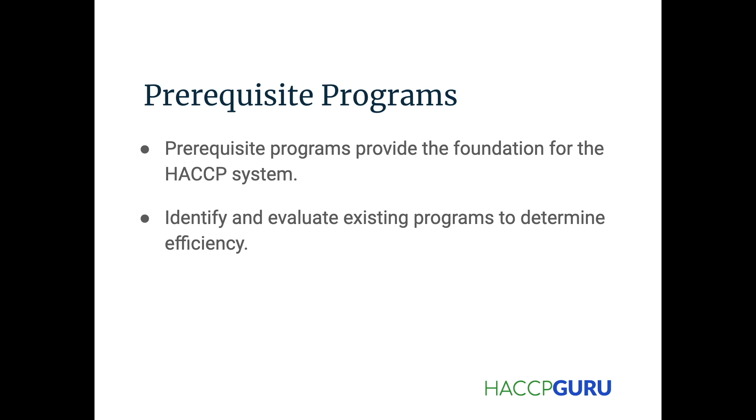So implement well-designed prerequisite programs first in order to do that. Prerequisite programs provide the foundation for the HACCP system and identify and evaluate existing programs to determine efficiency. So there's 5 initial tasks that we have to do in order to implement the HACCP plan system the right way.

One is assembling the HACCP team, which includes the HACCP coordinator and a multidisciplinary unit. It can't just be food safety and quality. It has to be comprised of logistics and operations and maintenance, all parties, right? Consultants, if necessary. Sometimes you don't need a third party to come in and do it, but they help, especially with audits and stuff.

Ad hoc groups. So how do I connect and contact everybody if we find out that we've got a big deal and we got to get product on hold? How do we make sure everybody's involved and everybody is aware such that we can execute and minimize the risk as soon as possible, right? We can't do that efficiently if we don't have some type of ad hoc group, some type of protocol to be able to disseminate that information responsibly.

Second one is describe the food and its distribution. So you use common names and ingredients, the nature of the product and the shelf life, the general description of the process, the type of storage and distribution, the parameters related to food safety like the pH, the water activity, packaging, preservatives, etc.

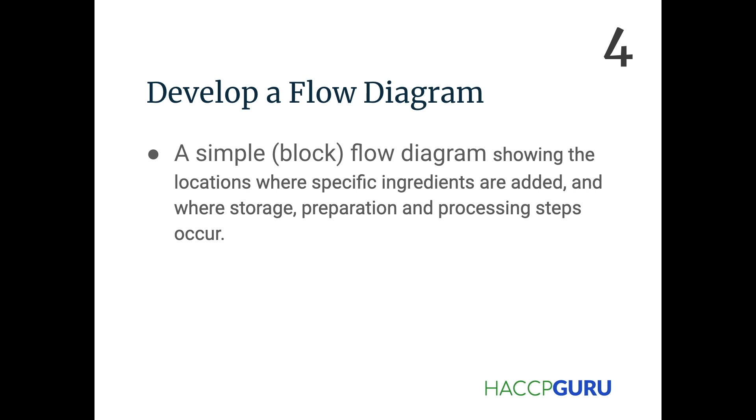And then the last one is description of product and process. So the block flow diagram should be supplemented with the description of product and process flow. It may include information associated with ingredient storage, preparation, equipment, processing, packaging, storage, and distribution.

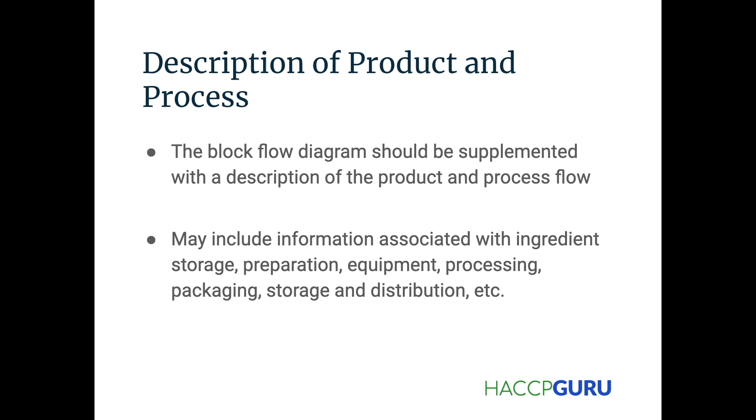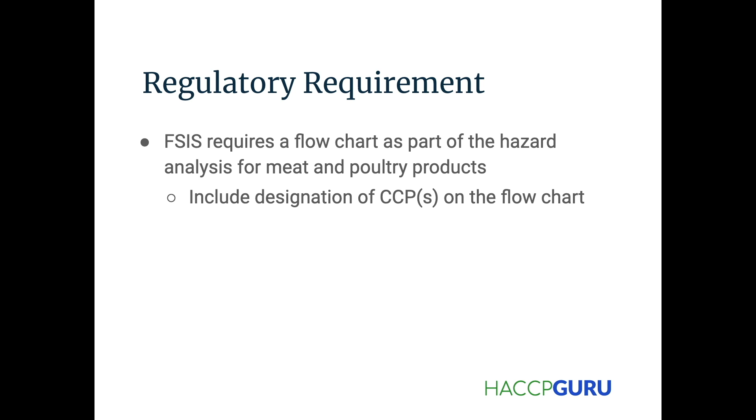There's a regulatory requirement as well. For instance, FSIS requires a flowchart as part of the hazard analysis for meat and poultry products, including designation of CCPs on the flowchart. We need to know where they are. We don't necessarily need to know where all the control points are, but everything that's critical needs to be identified.

So the last one is verifying the flow diagram. Now that we created it and we've got all the information on there, the CCPs, etc., now we've got to walk it. A flow diagram should be verified for accuracy and completeness on site during an inspection of equipment and operations in the whole facility. Usually that happens as a group, not by one person, because everybody's looking at the same thing differently, and we need all that information when we're putting together the program.

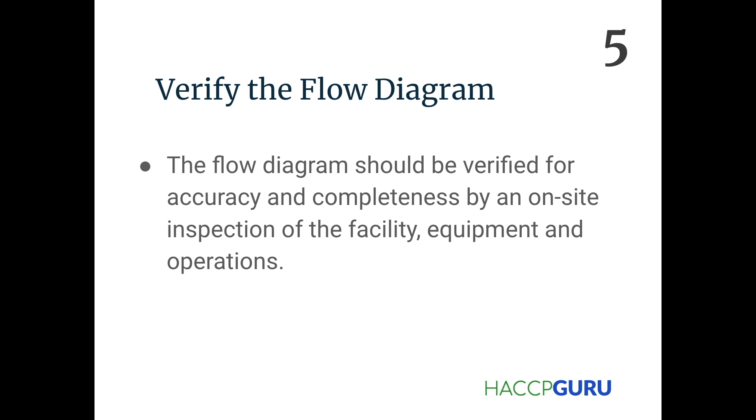So the summary of the tasks, again: assemble the HACCP team, describe the food and its distribution, identify the intended use and consumers, develop the flow diagram, and then make sure that it's accurate. Any questions? All right, that was quick.

So what are the two things that must be certain in order to develop a robust HACCP plan? Hopefully you wrote it down. The management team needs to be invested both in spirit and in the pockets. And then the prerequisite programs must be solid. You are well on your way to a good one after you complete those 5 tasks that we just covered. But these two have to happen before you complete those 5 tasks.

Finally, we've got the hazard analysis, and we're probably going to take a break after this, but we'll see. The hazard analysis is super important. Now we've got all the information, we've completed all the tasks, and we're ready to really take a look at this thing and understand it. We're going through the principles. So the first principle is conduct a hazard analysis.

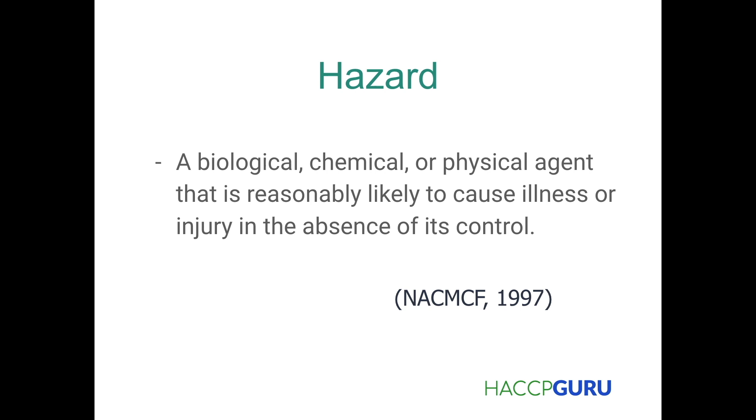Let's have this definition. We've seen it before. A hazard is a biological, chemical, or physical agent that is reasonably likely to cause illness or injury in the absence of its control. That's a hazard. Hazard analysis is the process of collecting and evaluating information on hazards associated with the food under consideration to decide which are significant and must be addressed in the HACCP plan.

There are 2 stages to the hazard analysis: the identification of the hazard, and then the evaluation of the hazard. The identification is just the list of all the potential hazards. Then, based on the severity and likelihood of occurrence, we evaluate those hazards. For hazard identification, we review the raw materials or ingredients used in the product, the activities conducted at or around each processing step, the equipment used to make the product, the method of storage and distribution, and the intended use and consumers of the product itself.

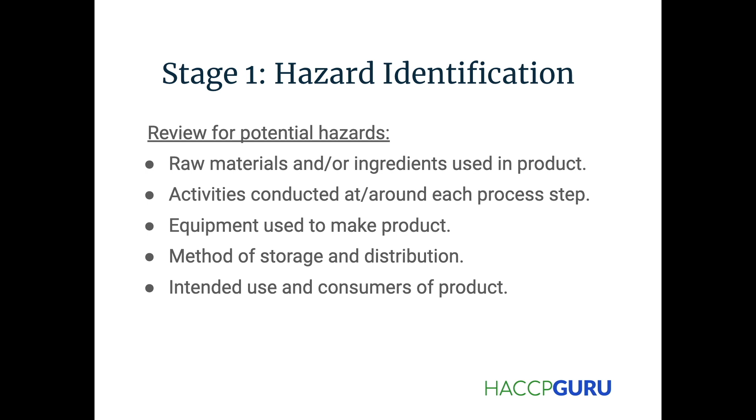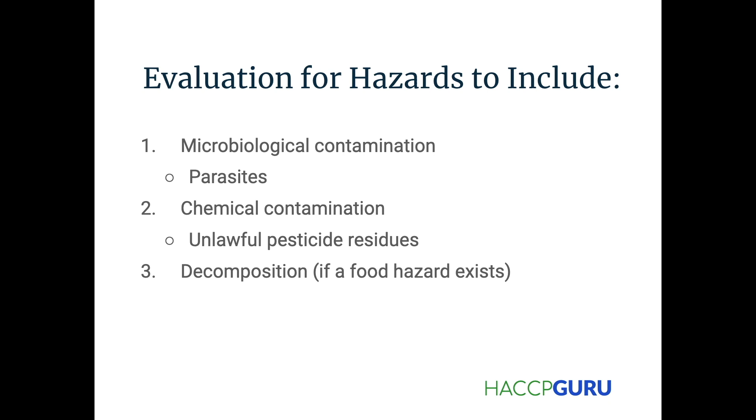Evaluation includes 3 different steps. You've got micro contamination, chemical contamination, and decomposition if the food hazard exists. These are all very important pieces. When it comes to hazards, you have natural toxins, unapproved use of food or color additives, presence of undeclared ingredients that may be allergens, and then you also have physical hazards.

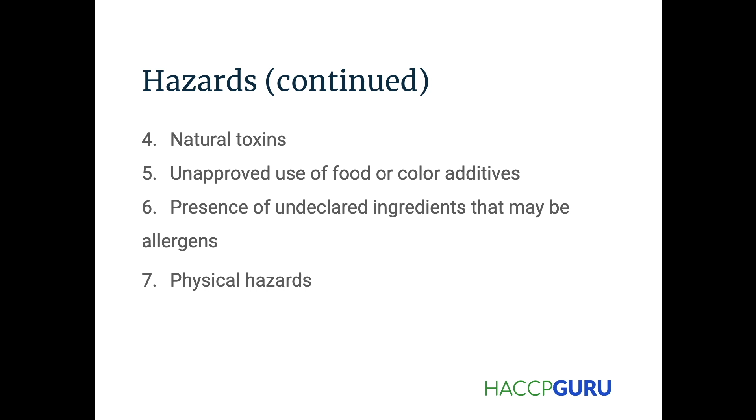Now, we are evaluating. The first step is to assess the severity. How serious is this? Consider the susceptibility of intended consumers, the impact of secondary problems, and the magnitude and duration of the illness or injury involved. So what does that mean? Say we're evaluating the hazard of salmonella in egg that we produce, and we don't have the COA for this egg product.

We're receiving it in. My operations manager is telling me that we need to make this production, turn over this product and ship it out, or we're going to lose orders from Walmart. If we lose orders from Walmart, it's just bad business. We may risk losing that shelf space. At the end of the day, the food safety and quality response is, respectfully, we're going to do whatever we can to get that product or ingredient replaced.

Maybe we can't get a hold of the supplier, maybe they can't confirm for us using the certificate of analysis that the salmonella is below a certain level. That doesn't mean we can go use this product. Maybe the answer is calling a sister plant or getting the supplier to do a next day delivery of something that's already been confirmed. Either way, it's not worth the risk to use product that we don't have confirmation for that it does not pose a food safety hazard to our consumers.

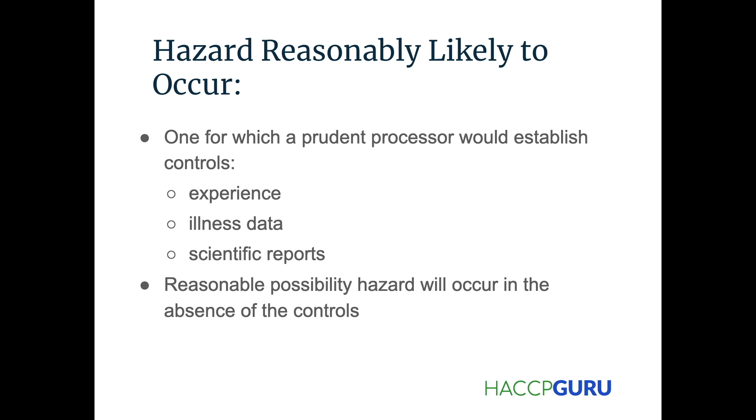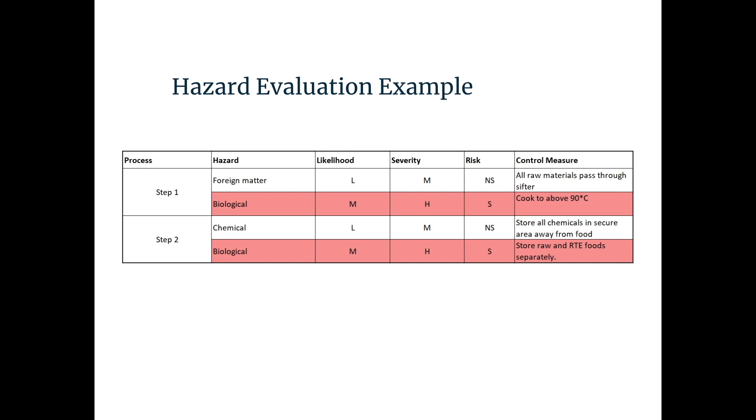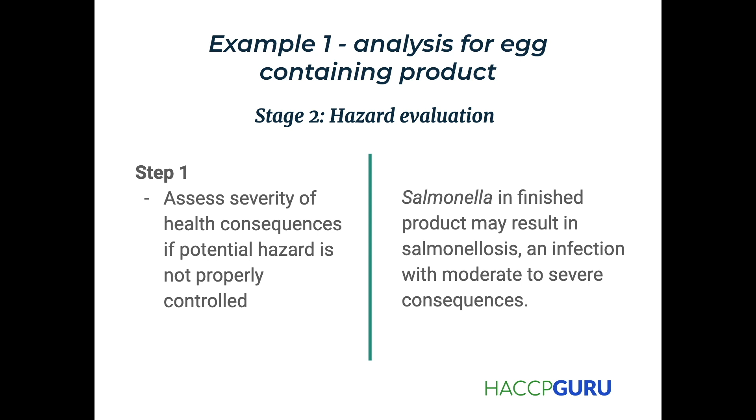Step 2, what is the likelihood of the occurrence? Product is made with liquid eggs, which have been known to contain salmonella. If not controlled, consumers are likely to be exposed to salmonella. We pretty much just talked about this.

Step 3, you decide if there's potential for this hazard to be addressed, or if this hazard needs to be addressed in the plan. And the answer for this particular case is yes. Salmonella from liquid eggs, if not properly controlled. Consuming this product presents a significant risk to our consumer, and so we do it.

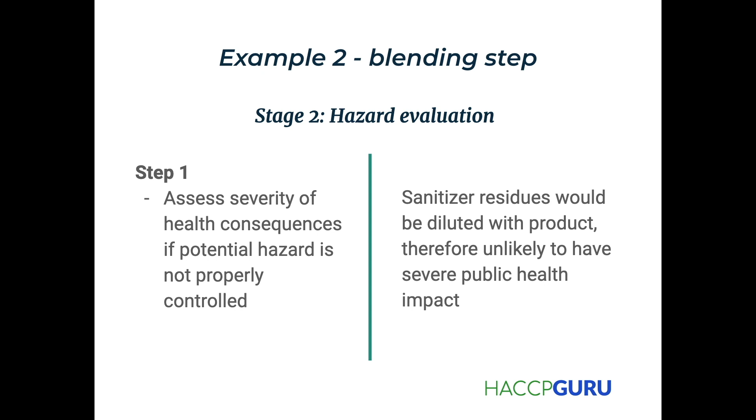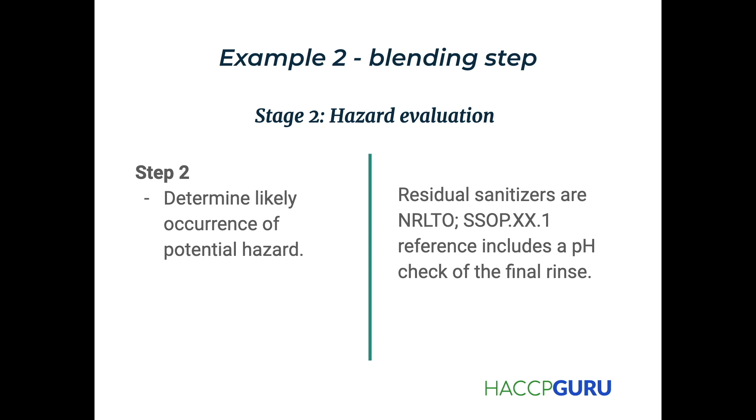Step 2, the residual sanitizers are XYZ, whatever, reference includes a pH check of a final rinse. So you've got the documentation there, and then you're saying, okay, now that we know this, is it or should it be part of the hazard plan? And we're saying no. The residual sanitizers are not likely to occur and unlikely to pose a health risk there.

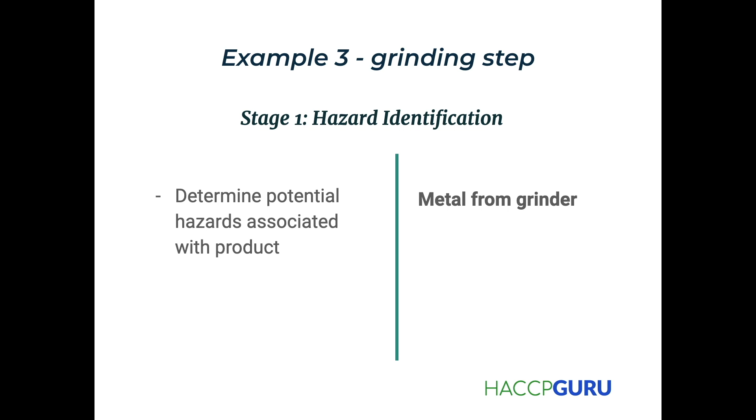Now, what about the grinding step for this other one? So this one, the hazard is metal from the grinder. After you look at the severity, you're saying, okay, metal fragments generated from grinding are below the 7 millimeter mark and are unlikely to cause severe injury.

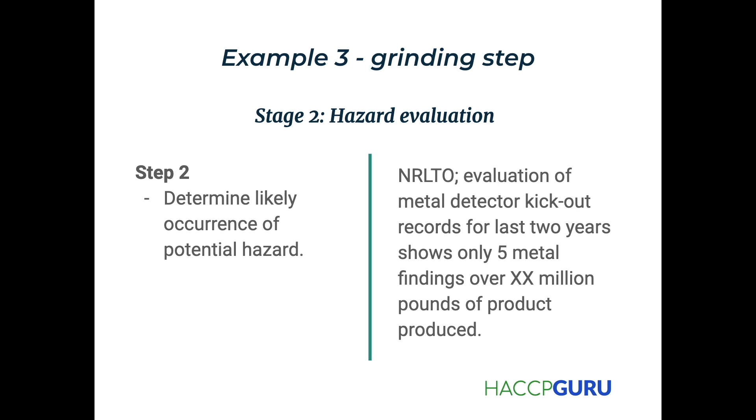So, evaluation of the metal detector kick-out records for the last 2 years, looking at data. Remember, we talked about data being one of the ways that we can prove it out. It shows only 5 metal detector findings over so many million pounds of product. So as a result, no, the metal fragments are not likely to occur and don't pose a health risk.

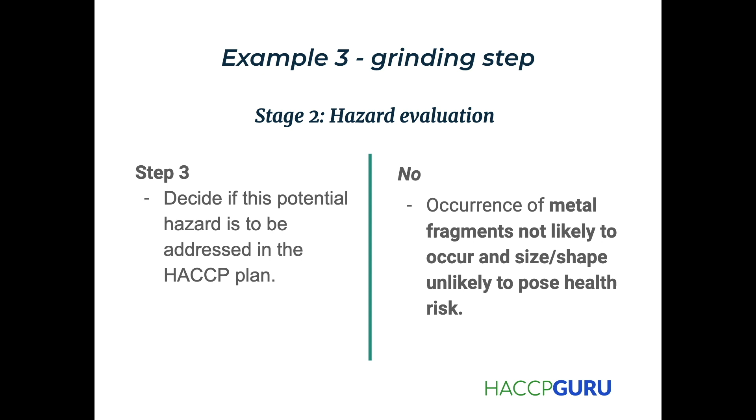The justification for omitting potential hazards from the HACCP plan is NRLTO, which is not reasonably likely to occur, even in the absence of the control, at levels likely to cause injury or illness in finished product, due to system design and because of a specific SSOP prerequisite program. These are the justifications as to why you can say a hazard doesn't need to be in a HACCP plan.

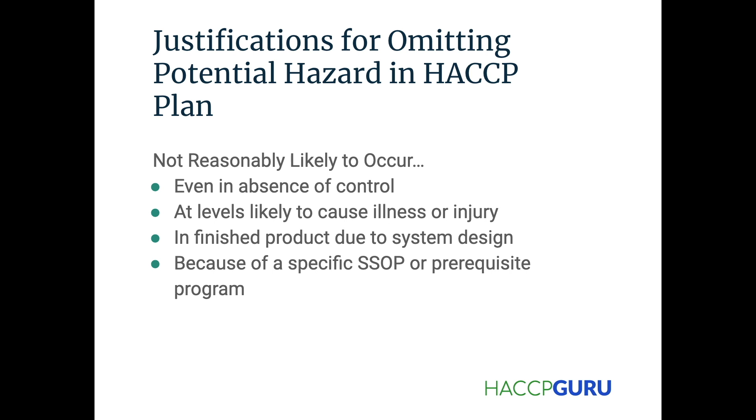After identifying hazards, identify how they will be controlled. A control measure is any activity or action to prevent, reduce to acceptable levels, or eliminate the hazard itself. So some examples are pasteurization, roasting, metal detection, filters, and acidification.

Control does not need to occur at the point the hazard first appears, and that's super important because I don't know why, but some people think that, and that's just not true. You can control that hazard later on down the line. Now, you still increase your risk of that hazard getting out, whether it's because you have accumulation of byproduct or offal, or product that can be reworked in the system. The longer you have potentially contaminated product in the system, the higher your chances of reintroducing that product or using it somewhere down the line.

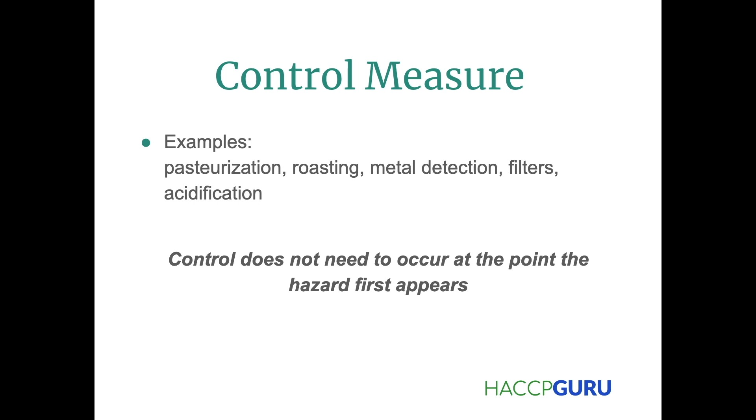So the best thing is to control it at the point of the hazard, but it doesn't necessarily have to happen that way, and it usually doesn't. Some examples: for point of occurrence, you've got raw juice, puree, and equipment. With raw juice, you've got vegetative pathogens identified, and the control measure is pasteurization. With puree, you've got sulfites, and that one is labeling. And lastly, with equipment, you have metal fragments, and we use metal detectors to control that.

Some regulatory considerations include the hazard analysis required component. The USDA and FDA juice HACCP regulations require a written hazard analysis. The FDA seafood HACCP regulation does not. Specific hazards have been identified by the agencies. The agencies require scientific justifications for evaluating hazards.

So essentially, regulations can be different depending on what you're producing and where you're producing it. And understanding what the regulations are helps you protect the food and the consumer, but also protect your company, your organization, and the place that you work.

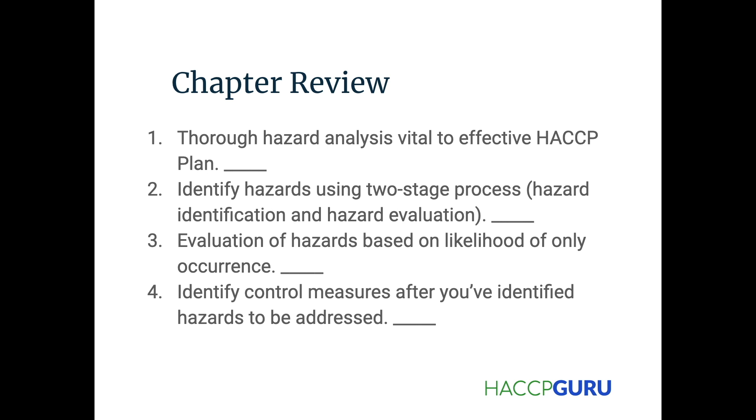Okay, so principle number 2 is determining the critical control points. Now that we've identified and evaluated the hazards, we're looking at how we can control them. The critical control points are the bread and butter of the HACCP plan. You need to understand where they are and what the critical limits are within those critical control points.

Whenever a critical control point is not working or not in effect, then essentially you're saying the product stands a chance of having a hazard along the line during production that you can't identify. You always want to be able to detect when the issue arises. That's the job of the critical control points. Therefore, if it's not working, then you probably shouldn't be running.

So CCPs, or critical control points, are based on the results of the hazard analysis we talked about before. They all are significant hazards, and they all have control measures associated with them. Identify one or more CCPs to control each significant hazard. Sometimes you have more than one CCP to control a significant hazard, just to have multiple lines of defense before that hazard gets out of your control, out of the facility.

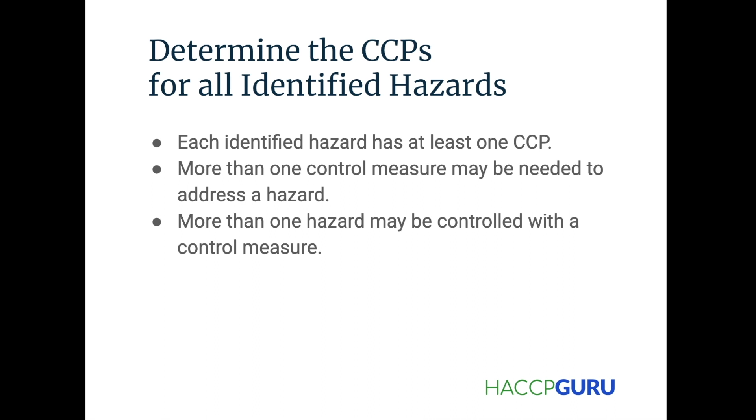So my heat treatment could be taking care of salmonella on one hand, but it also could be taking care of listeria, or it also could be taking care of fill in the blank of one of the biological hazards, right? It does that and you have to have it listed in your hazard analysis that basically states what is this CCP taking care of. Once again, because if in fact something happens to this, and Murphy's Law says that at some point you will have an oven that goes out.

What is our justification to operations to say we can't run this line, right? They're using you. We need you as a subject matter expert in food safety and quality to say, yep, I know we need to meet this quota. I know we have Walmart orders that are due tomorrow night, but we can't run tonight until this oven is fixed, right? And here's the proof. Here's the justification. This oven makes sure that we don't have, for instance, salmonella in our product.

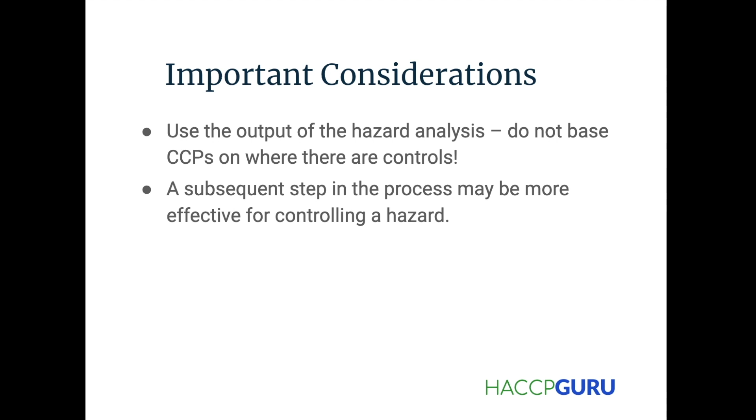So here are the important considerations here. So use the output of the hazard analysis. Basically, do not base the CCPs on where there are controls. So once again, that's why this hazard analysis is so very important. It's also a working document because things change within your product, things change within your system itself. You always got to use this hazard analysis and use that as a foundation of the decisions that you make

further down the line. A subsequent step in the process may be more effective for controlling the hazard. So understand that, when you're defining your CCPs, you have to look at the system as a whole. That's what this is basically saying. At some point in time, you got to make a decision, but further down the line is always at some point easier to control, because although you have a lot of space in between maybe where the hazard is introduced to the line, if you do it further down the line, you have a better chance of making sure that hazard does not get out the door.

So what is the CCP decision tree? The CCP decision tree is a tool to help determine the appropriate CCPs that are identified within a system. So these different organizations, they have examples of this. They do not apply to all potential hazards. They usually only apply to these CCPs. Once again, it helps you to make a decision. That's what it says. It's a decision tree. It's an easy way to make a decision without having to use that kind of brain energy and brain power when something comes up. Now you can rely on documentation in order to make that decision.

There's so many other things that happen when a hazard comes about. There's so many things that happen when you are managing a hazard, like logistics, potentially shipping product out the door. You don't want to exacerbate the issue. So the CCP decision tree helps you to make that decision based on foundational understanding of the hazard analysis, while using your other energy, your brain power, majority of that communicating to the necessary parties to make sure that you're wrapping your arms around the hazard such that it doesn't become an even bigger issue. So that's what the decision tree is for. It helps you to determine what you should be doing when an issue arises.

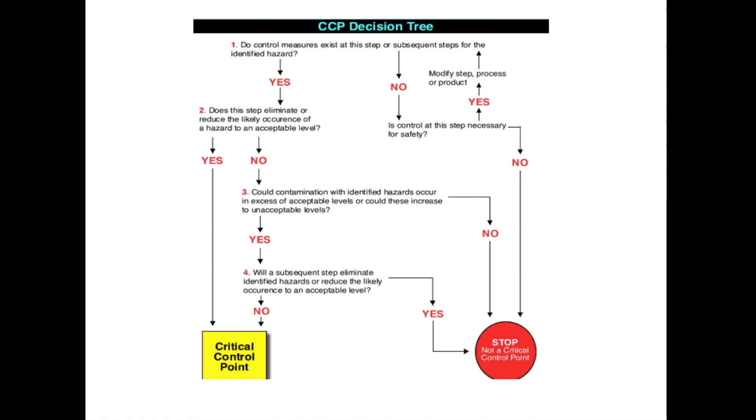Number 3 says, could the contamination of the identified hazards occur in excess of acceptable levels, or could these increase to unacceptable levels? If the answer is yes, you keep on going, right? And so you keep on going, you ask yourself these questions till you get to the bottom end. Either it's a critical control point or it's not one, right? So this helps you to define that.

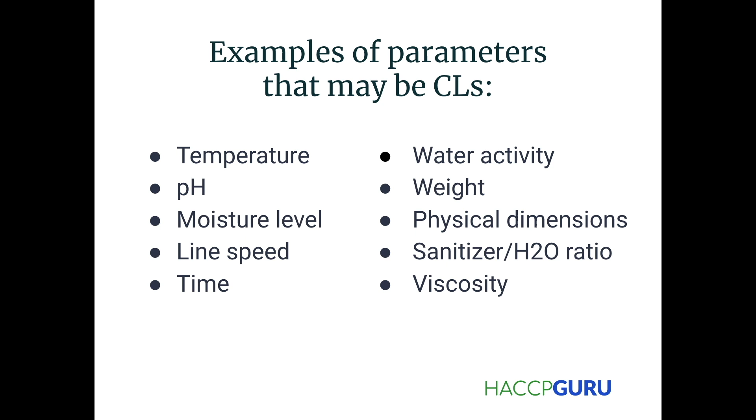Line speed. How can line speed even be a critical limit? We can talk about that a little bit later. Water activity, weight, physical dimensions, sanitizer to water ratio, and then the viscosity. So these are some examples of what you can see on a critical control point to determine whether it is within our limits or not.

So for a metal detector, it'll say, yep, it's on and it's functioning, right? So it's on, meaning metal can't go through without being kicked out. On says that it detects the metal. Functioning says that it detects the metal and it's going to kick it out such that it doesn't make it past that point, right? So it needs to be on and functioning. If it's on and it detects the metal, but the device doesn't actually kick it out the way it's supposed to, and that's happened to me on multiple occasions, then it's not functioning properly, which means that essentially it's not working, right?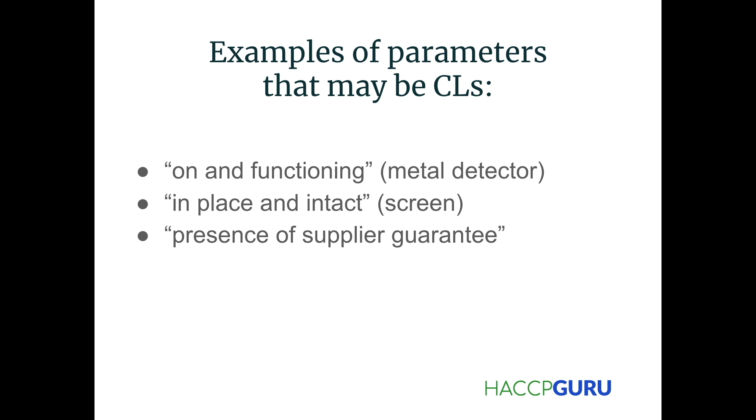For a screen, it needs to be in place and intact. So not only should it be in place, but you can't have a screen that is allowing product to get past it that shouldn't. So that's where the intact part comes from. And then the presence of a supplier guarantee. So not having one or having one. If you see it and there's presence, then it's good. If you don't have it, then you're failing on that critical limit. That's outside of the critical limit there.

A critical limit is not an average value. So you have a minimum or maximum value is what we're talking about. You don't have "this is an average and so we should be fine." No, if it's outside of that limit, then it's no good.

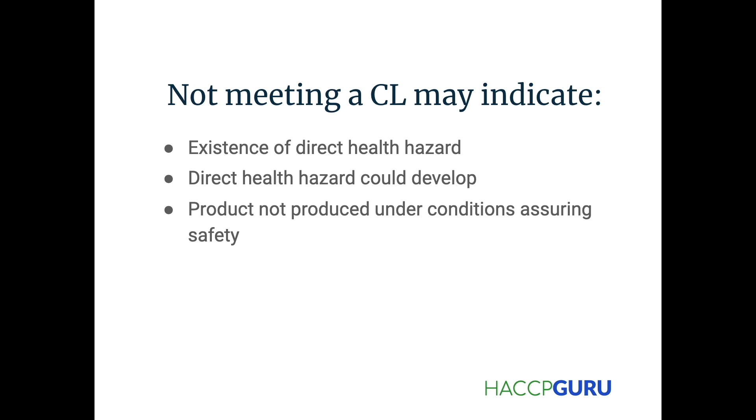So different examples of not meeting a critical limit may indicate an existence of a direct health hazard, or a direct health hazard could develop potentially further down the line, or product is not produced under the conditions that ensure safety of the consumer. These are all ways that basically you can potentially harm your consumer if your critical limit is not met. And if that does not mean that, then you need to determine whether or not it's really a critical limit for your critical control point.

Setting the different critical limits. So the HACCP team determines the standard and the benchmark to be met. And the criteria may be established by regulatory standards and guidelines. For instance, you got action levels, you got performance standards and things of that nature that are very important. However, you have to analyze the entire gamut and understand what your critical limits are.

Once you set those, they can change, but once again, we'll talk about it. We've said it before. We're going to say it again. It's all about documenting that. So once you establish your critical limits, it needs to be documented in more places than one, such that everyone understands what those critical limits are and what the actions are after you are outside of those limits.

So examples of regulatory standards or guidelines for critical limits are the maximum allowable concentration for patulin in apple juice, the FSIS 7 log reduction of Salmonella in cooked poultry, and the 5 log reduction of pathogens in juice. I've dealt only with the 7 log reduction of Salmonella for cooked poultry. But when we did that, it was a test where we had to do an experiment to determine if we got a 7 log reduction.

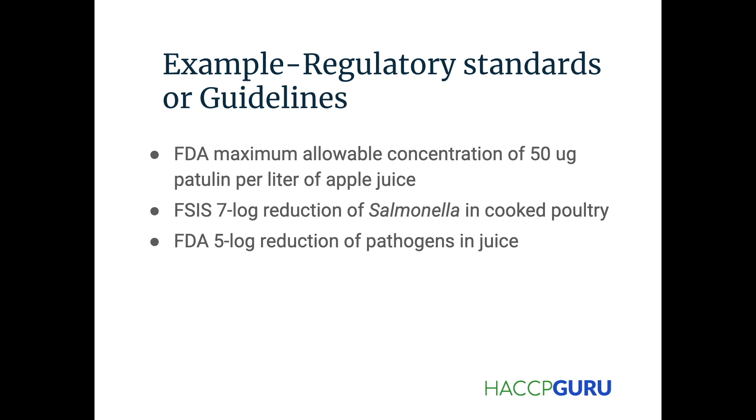And if we didn't, then we had to do something to the system, to the oven itself, in order to get that 7 log reduction on a repeated basis. You have to determine how you get that 99.9% confidence that you do establish a 7 log reduction. Because if you don't get that, then you haven't proven anything.

So how do you set these critical limits? There are multiple ways you do it. You've got research, scientific publications, government guidelines, and consultation with certain experts.

We recommend that you develop your critical limits for the type of operation that you're working on. For instance, let's say that you're achieving an internal temperature of 151 degrees for meat patties at 41 seconds. From a product related standpoint, the internal temperature of the product needs to be 151 degrees or more for 41 seconds or more, which means that if it's 155 degrees for 46 seconds, then you're still within that limit, right? You still have achieved the minimum standard for that meat patty. So you're still satisfied, you're good.

Another way to look at it, as we talked about before, we talked about line speed as being one of the ways that we can measure this. So you've got an oven temperature at a belt, and it needs to be more than 300 degrees Fahrenheit with a belt speed of less than 8 feet per minute. The initial temperature is more than 32 degrees and a patty thickness of less than 15 millimeters, right? So one was product related, the other one was process parameter related.

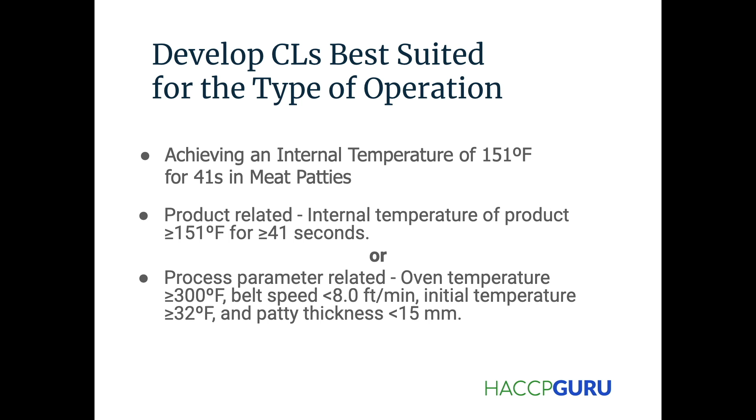So different experiments that have been used to establish the critical limits: heat penetration, temperature distribution, thermal death time studies, inoculated pack or microbial challenge studies, metal detector sensitivity studies. There's a lot of studies, as you can see, that you do. I've done the temperature distribution and the heat penetration before. Metal detector sensitivity experiments, I don't know if you call it a study, but I've definitely done those and worked with the metal detector before. So it's quite a few that you do.

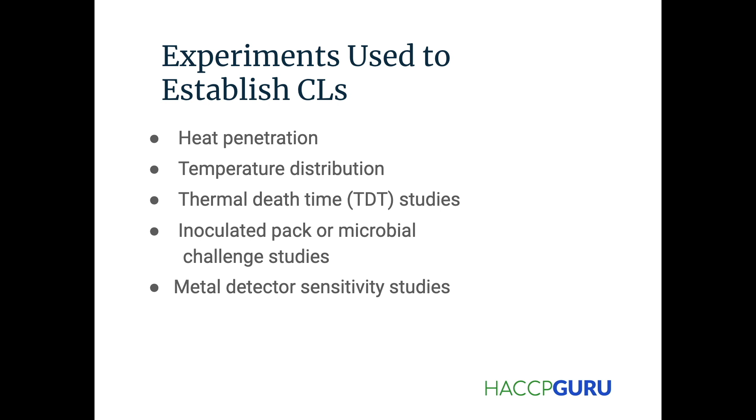But once again, you have to have that confidence level that it's repeatable. If it's not repeatable, then you can't necessarily establish it and be ready to say, yep, this is the critical limit as a result of this experiment. So one thing we don't want to do is confuse critical limits with operating limits. We need to understand what the difference between those two is.

So operating limits may be set for quality or non-safety purposes, usually operational purposes. How do we maximize our output, right? How do we not throw away money? How do we maximize our quality for the product such that the consumer can't tell what shift this product was made on, or what facility this product was made in, right? So that's essentially what this is talking about. With your operating limits, you can't exceed the limits for safety, the critical limits that we were just talking about.

We allow for process adjustment. So before the critical limit is exceeded, the operating limits are supposed to give you a warning. So maybe you're two standard deviations away, and you're notified where you are. One standard deviation away, you're even more notified, right? So if the operating limits are set properly, they should give you a warning of how close you are to your critical limits, such that you don't even exceed those critical limits. You don't even get close to it.

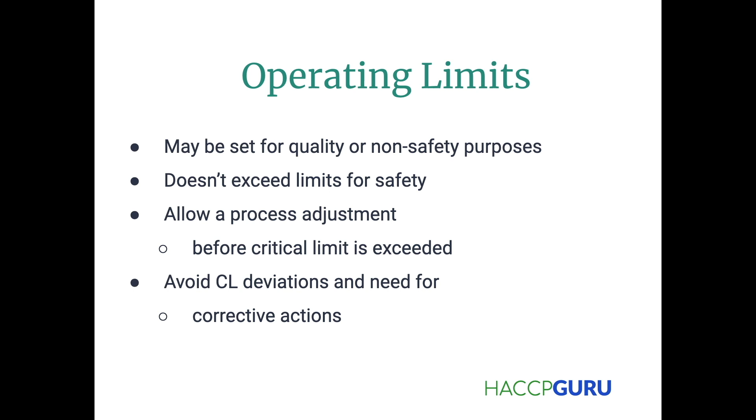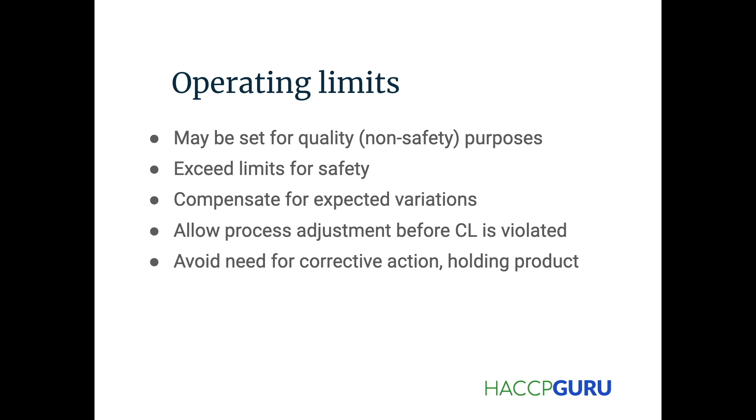So as it says in this last bullet point, the operating limits allow you to avoid critical limit deviations and the need for corrective actions, which we'll talk about a little bit later, I think in the next section. So, as we said before, operating limits may be set for quality purposes. They don't exceed the limits for safety. They compensate for expected variations. They allow process adjustment before the critical limit is violated. They avoid the need for corrective action and holding product.

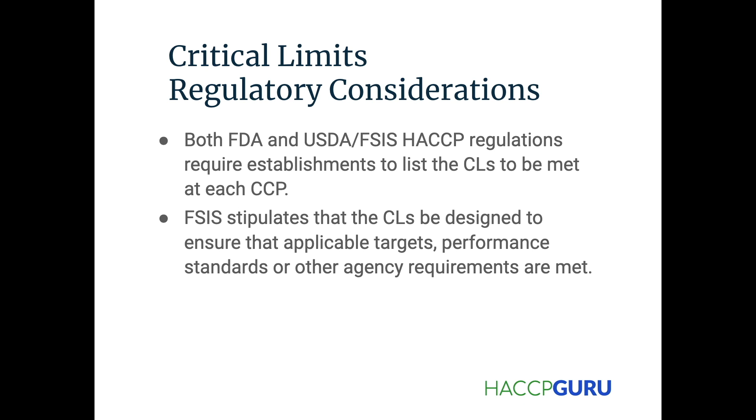So regulations all require the establishment of critical limits to be met at each CCP. FSIS stipulates that the CLs be designed to ensure that applicable targets, performance standards, and/or other agency requirements are met. So maybe they have tighter stipulations around that, but essentially you've got to make sure that you are establishing your critical limits and that it is documented. You've got to make sure it's documented. And that's it for critical limits.

So looking here at the chapter review: a critical limit can be an average value, true or false? And the last one: operating limits are within critical limits, or critical limits are within the operating limits.

All right, so for number one, the critical limit can be an average value. That is so not true. That's not true. It doesn't happen that way. You have to have a range, a minimum and/or maximum value for this, right? And if you're outside of that range, then it's no good, no bueno.

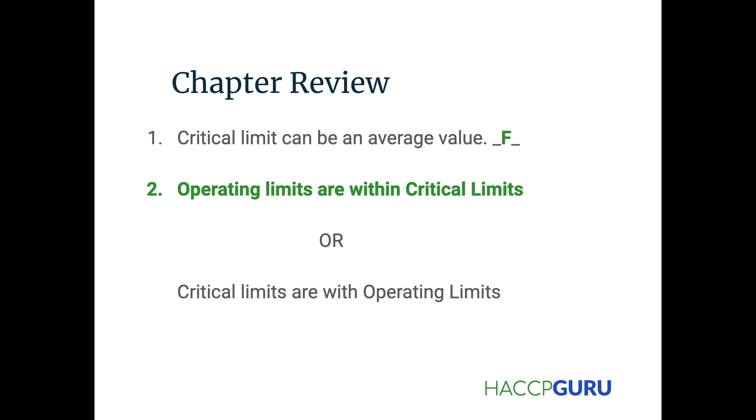For number two, operating limits are within the critical limits. Remember, the operating limits allow you to get some kind of warning there to let you know, hey, you're coming close to this critical limit, and if you exceed this limit, guess what? There's some consequences, repercussions, right? AKA corrective actions. When that happens, we need to do something in the system in order to get us back into operating limits, and to make sure the product that was outside of the critical limits, we need to do something with it, right? So that's what the operating limits are for: quality, non-safety, but also to give you a warning when you're coming pretty close to being outside of and violating the critical limits.

All right, so principle number 4 is establishing the monitoring procedures. So what are those? To monitor means to conduct a planned sequence of observations or measurements to assess whether a CCP is under control and to produce an accurate record for future use and verification. Now, that was a lot, but what that means is we just need to conduct observations or measurements. This is a check, a monitor.

How are we checking the system? What does it look like? What's the health of the system at this point in time? Every time you monitor the system, you're looking at this point in time. What is it doing today, right now, at this very second? Are we good? Are we not?

So what are we monitoring when we say that? Or who are we monitoring? When you say you're monitoring, there are a couple questions that you ask. What is it? So is it the oven, for instance, like we said? Is it the conveyor belt, the conveyor speed, the metal detector? What is it? How are we monitoring it? When are we monitoring it? Is it every hour? Is it twice a shift? Is it every 30 minutes?

And lastly, and just as important, who is monitoring it, right? You can't have multiple people monitoring the system for more than one reason. One of them being that when it's everybody's responsibility, it's nobody's responsibility. Somebody has to take the lead and understand that it's their job, such that we have the confidence that it gets done on the set frequency, whenever we deem it necessary.

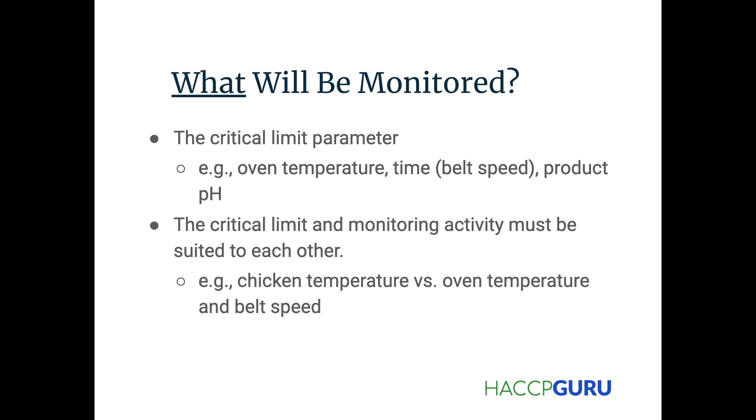the chicken temperature, right? So let's say I got my oven temperature at 300 degrees Fahrenheit, I got my belt speed at 2. I don't know what 2 means, but maybe it's something, right? So you got the belt speed at 2, and that translates to a certain chicken temperature for a certain period of time, right? And so once we understand what that translation is, that'll let us know, yep, this is our critical limit, and if we go outside of this critical limit, no bueno, right?

So the second piece is how would it be monitored? So you have measurements, for example, pH, time, temperature, water activity, etc. And then you have observations. So is the screen intact or in place? Is the ingredient added? Etc. Right? So note here that monitoring activities must provide a real-time assessment of the status of the CCP. Remember, I was telling you, in that point in time, at that moment, what is the assessment? What is the status of this CCP?

So when will it be monitored? There are multiple ways to monitor. Continuous is preferred, but it's usually not realistic unless you're talking about it being monitored on or by a computer of some sort. Discontinuous is periodic, like the metal detectors. You check it once every shift, twice a shift, once every hour, that kind of thing.

So there's certain considerations for monitoring, and you talk about periodic monitoring. The interval must be short enough to detect possible deviations. What does that mean? I don't want to check my metal detector once a day, because if I run 3 shifts, that's 24 hours. If I check it once a day, then it's going to cover me for that day.

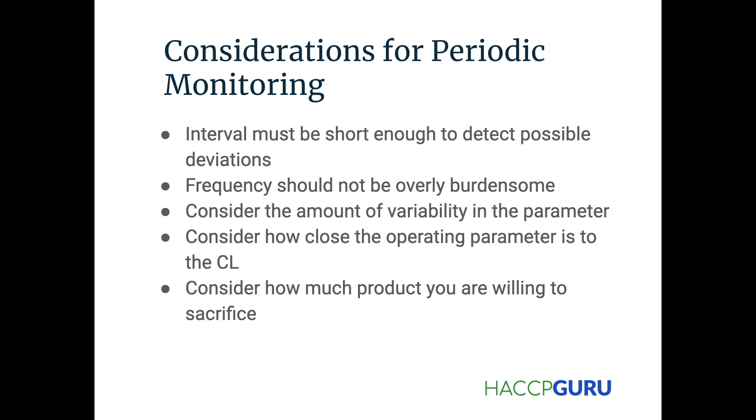What I'm trying to say is, the hazard determines what you can do with that product. And what you can do with that product kind of determines how much product you want to sacrifice as a result. When you end up outside of your critical limit, is that a day's worth of product, which hopefully it is not? Maybe it's like 5 minutes worth of product. Maybe it's one batch of product. But considering how much is very important as well.

All right, so when will it be monitored? It's important to conduct the monitoring activities at least as frequently as specified in the HACCP plan. So you determine what the frequency should be by the HACCP plan. But once you do that, you need to make sure that you're monitoring at least as frequently as what it states in the HACCP plan.

Case in point, if it says in the HACCP plan that I need to check my metal detector twice a shift, then I can't check it once a shift and be okay. But I can check it 3 times a shift. I just checked it 1 extra time. That's okay, because not only did I meet the expectations, but I exceeded them.

Missing a monitoring activity can have the same consequence as not meeting a critical limit. So let's say you are running within critical limits, but you just miss the monitoring activity. Once again, it was supposed to be twice a shift. I only did it once a shift. Well, I don't know what to do with this product that I didn't check it for, right? I got to go back to the last good check. And so that's what that states.

Who will perform the monitoring? So we have to designate people. Once again, if it's everybody's responsibility, then it's nobody's responsibility, because people need some type of accountability, and to make sure that we're getting it done on a frequent basis, on the frequency that was deemed in the HACCP plan.

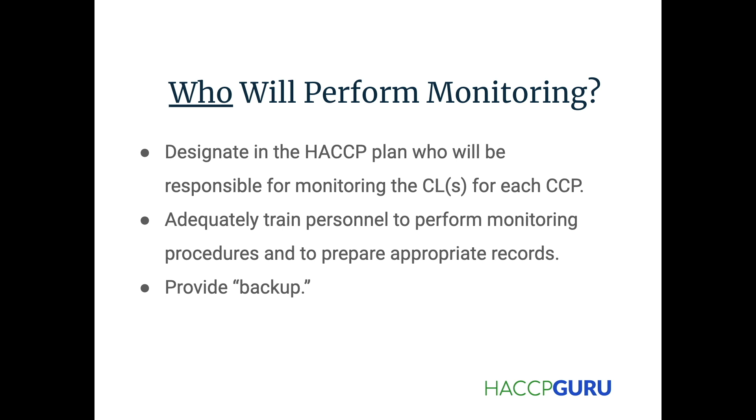So for example, let's look at the screen. So what is monitored? You got the screen, and you got to make sure it is intact. If it's intact, we're good. How is it monitored? Well, it's monitored visually. You need to look at it. If it's there, no issues, it's not fraying or anything like that, then we're good. When is it monitored? At startup and at the end of operation. Okay, that works. Who's monitoring it?

The production employee. So that doesn't mean that the supervisor can't look at it, but documenting it and on the HACCP plan and through the training, we need to make sure that the production employee and a backup can do it.

So there are regulatory requirements that come along with this that basically require the HACCP plans to list the monitoring procedures and frequencies for each CCP that ensure compliance with the critical limits that we've established for each CCP. Monitoring records must be prepared as well when the monitoring activity occurs. So every monitoring activity has to come along with it, and someone has to document and sign at that particular date and time when they check the CCP to say that it's working properly or it's not working properly.

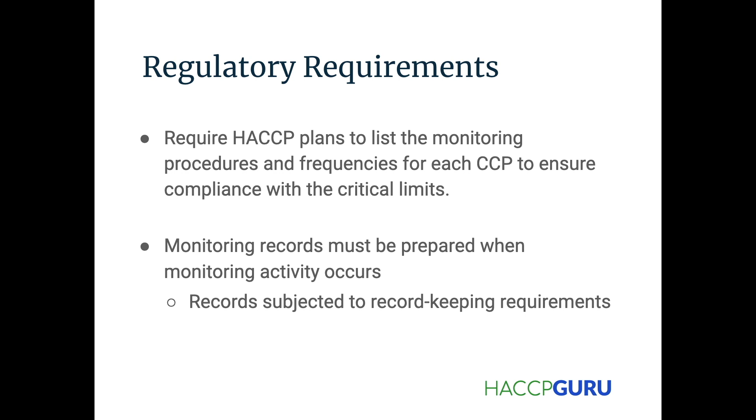Records are subject to record keeping requirements, which is another section in the HACCP plan that is all about record keeping, but this is part of it here. Whether it works or not doesn't matter. We got to document it.

All right, so the screen is intact. That is what we're monitoring. We're monitoring the screen, not the production employee. We can talk about that a little bit later, but if you're monitoring the production employee, then you're doing something different. You're not monitoring the system. You're pretty much doing a verification that they are performing their work the way that they should. That is an important piece, but it's not included in the monitoring section of HACCP.

How is it monitored? We monitor it visually. You can't electronically look at a screen. Maybe you can, but most of the screens that you work with in the food industry, when you're dealing with product ingredients and stuff like that, you're visually monitoring that screen to make sure that it is there in place and intact. When is it monitored? So this can vary, but in that particular case, it's at startup and at the end of operation.